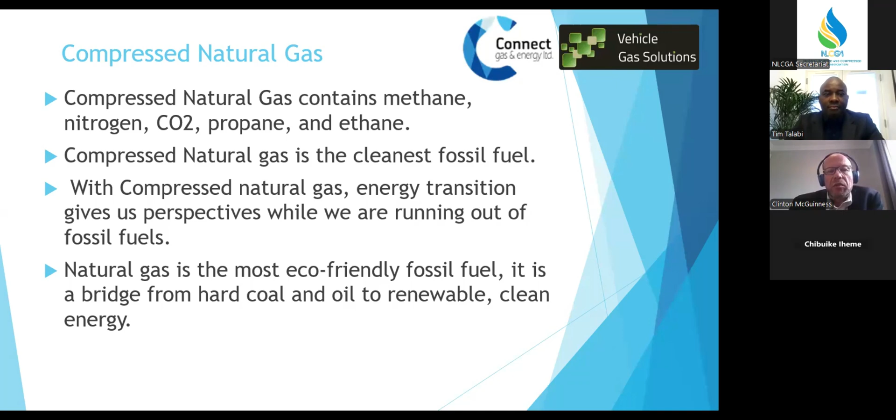The question always comes up, what is CNG? It's a very nice gas because it is cleaner. It's methane gas, not a propane such as LPG. It's lighter than air. The unfortunate part is you have to compress it, but all the regulations are followed, and the equipment used makes it very, very safe. The gas is sourced from coal bed methane or from a natural source or area, then cleaned and put through a compression station into what we can then transfer into vehicles to run them. It's also the cleanest fuel that you can use from the fossil fuels in terms of exhaust emission. If we can move on to the next slide please.

So the difference between CNG and LPG. CNG is compressed natural gas, mainly methane, compressed at 200 bar to 250 bar. Let me explain the two differences. 200 bar is part of the regulation - you cannot put more than 200 bar pressure into a cylinder which is in a vehicle. But if you are transporting it for industry and need to take more volume, you can put the gas into a tanker that can handle the 248, 250 bar pressure.

LPG is liquefied petroleum gas, a mixture between propane and butane. You would also notice that in LPG there's a different mix sometimes from cylinder to cylinder, and you'd be able to smell it - sometimes the LPG smells a bit stronger than the next bottle. It's all to do with the mixture between propane and butane. LPG is also heavier - if it leaks, it drops to the bottom. With natural gas, if it leaks, it dissipates into the air. So natural gas is a lot safer, especially since the gas can disappear into the air instead of pooling and laying on the floor. Generally CNG is a lot cheaper than LPG - that depends on who's supplying the CNG and who's supplying the LPG, but generally CNG is definitely a cheaper fuel. If we can move on to the next slide please.

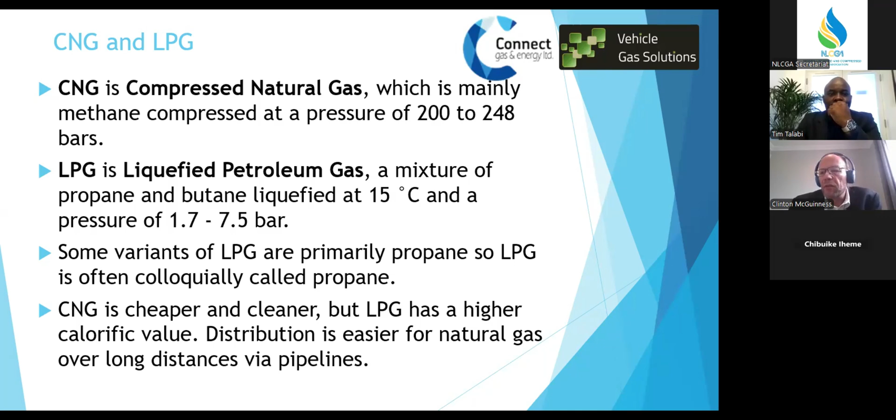The advantages of CNG: it reduces carbon footprint. In many cases, companies taking part in the actual cleaning of the air like this gas because exhaust emissions are a lot cleaner when it's used. They can also claim green points. It eliminates about 20 to 25% less greenhouse gases. Coming back to it - natural gas is the cleanest fossil fuel you can get. It's a proven technology in the world where a lot of vehicles run on natural gas, not just as a fitment off the market, but also where you can purchase a vehicle that just runs on natural gas, not running on two fuels like petrol and gas or diesel and gas. Like I said, it's very competitively priced.

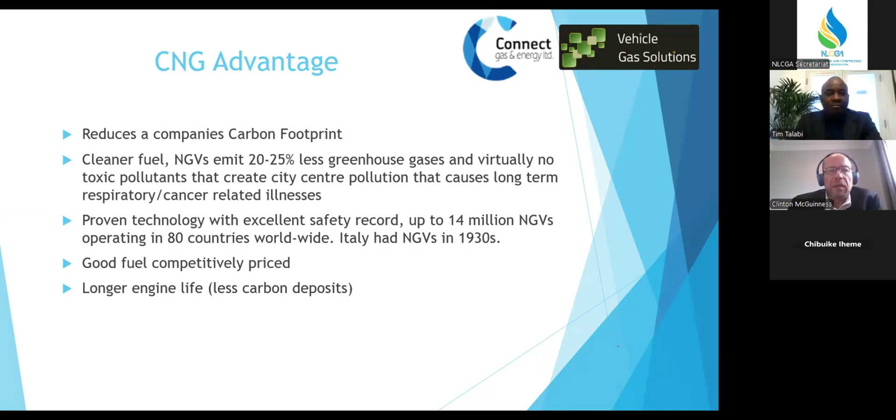In general, your carbon deposits in the engine are less. So if you're running on natural gas, you'd be able to save your engine and prolong your service a little bit more. We don't recommend deviating from it though - we recommend following the manufacturer's service history and schedules. But in general, the oil stays a lot cleaner than what you would get running on normal petrol or LPG.

Filling time is pretty much the same as petrol - if you're filling a cylinder to full versus filling a petrol tank, the time is more or less the same. The performance on a petrol vehicle is similar. Natural gas in its own form is not as strong as petrol, but it can handle itself when we talk kilowatts and horsepower. I don't want to bore you with all the technical information regarding that.

It's non-toxic, so the exhaust is a cleaner emission. I explained to you about it being lighter than air. If you smell gas, it smells similar to LPG, but that's because they put an odor into the natural gas - natural gas on its own hasn't got a smell, and you need to add odor to it in order to identify if it leaks.

It's got a very narrow flammability - where LPG will take just a small particle of LPG mixed with a bit of air and flame immediately, your natural gas needs a lot more gas mixed with air in order to take flame. So in that sense, it's a safer fuel as such.

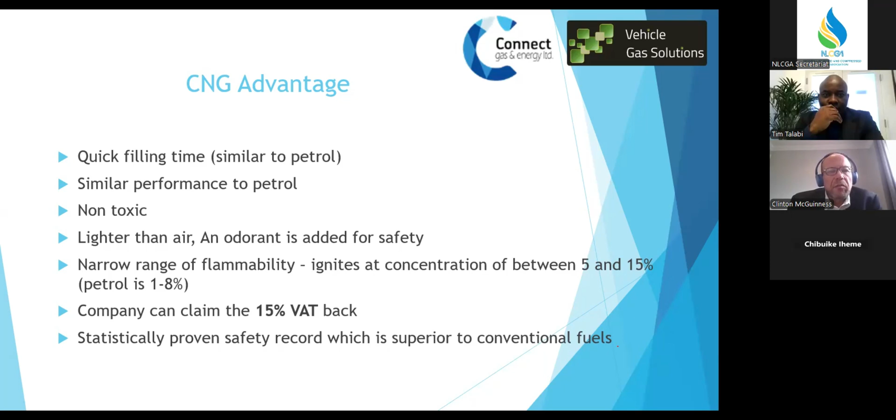It's got a very safe record, safer than I think LPG, but that is just my personal opinion. If we can move on.

In the beginning, in my 15 years of experience, we started off just converting anything that runs on petrol or LPG in order to run on natural gas. Later, we started realizing we could run it in a diesel application with our supplier, and we started doing diesel conversions because the industry turned from petrol vehicles to diesel over a period when diesel was a lot cheaper than petrol, and all the vehicles eventually traded their petrol vehicles in for diesel.

So now we do diesel, what they call dual fuel. If you allow me, I'll take you through what I mean by that - if you can go to the next slide.

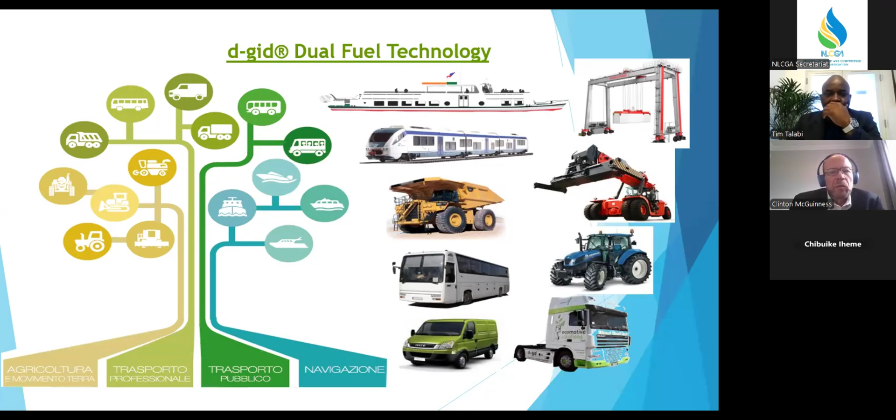What we do is we still use diesel, but we minimize the amount of diesel injected into the engine, and we replace the energy value removed from the diesel with natural gas into the actual engine combustion chamber. Therefore, the diesel engine stays at exactly the same kilowatt horsepower.

It's very important for us to make sure that the mixture of energy is the same as what we remove out of the diesel, to ensure there's no kickback on the gearboxes and the gearboxes hunting for gears.

Just by using our system, we can use the CAN line or the accelerator pedal, and we're able to cut the truck's ECU or the generator's ECU, and tell the ECU we only need so many milliseconds of diesel injection, and we'll take care of the natural gas we put in to bring the energy back to where it's supposed to be.

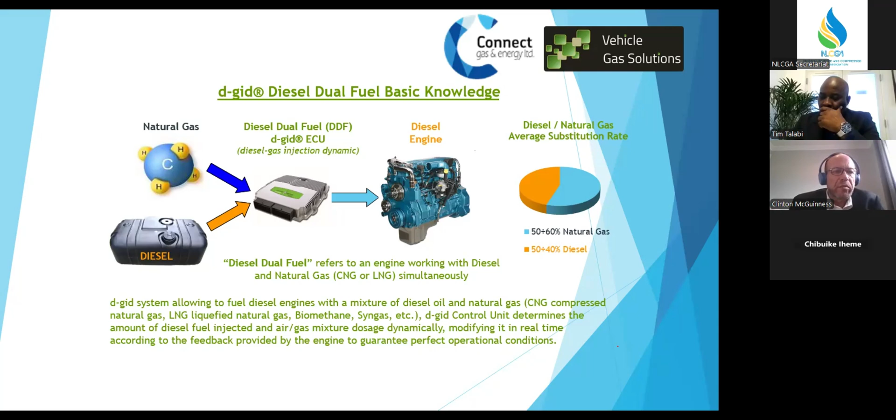If we can move to the next slide, please. Also, we went into the farming industry, the tractors and so forth.

We realized that there's a need in the actual farming industry, and we had to come up with a way to put the cylinders onto a vehicle that works off-road in very rough conditions. If we can just move to the next slide.

Here you will see that we actually fitted cylinders on the front of the tractor instead of the weight that a tractor normally comes with. This is a quick coupler which feeds to the engine from the cylinder.

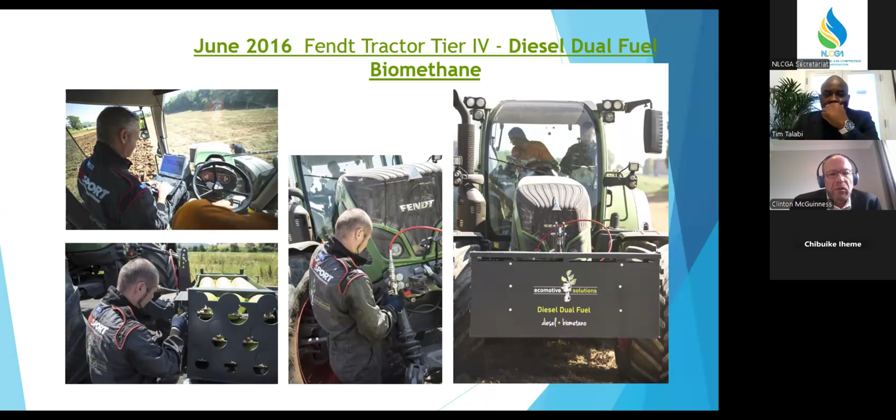So the farmer will farm with his tractor in dual fuel mode, and when he's done, he'll drop the front pack and pick up a new one that's been filled. So when it comes to a compressor, he'll use a small compressor - he doesn't need very expensive high compressors in order to run his project on his farm.

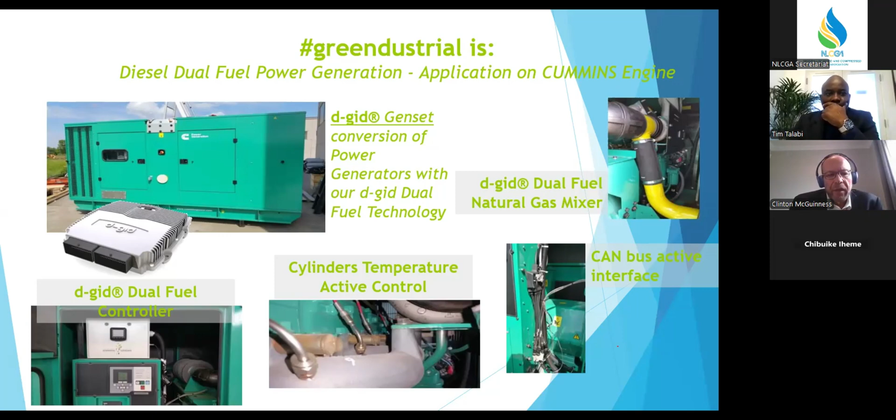We used CNG for a test before the LNG was introduced. You'll find Caterpillar has got an LNG CAT 777. The mine decided to go with us because we are a quarter of the price of what an LNG CAT 777 would be. In the next slide, I hope to demonstrate the engine we converted, one of the trucks.

This was done on a dynamometer. The engine was put onto a dyno, and we fed dual fuel gas into the actual unit.

It doesn't want to play for some reason. Okay, if you don't mind, I'm just going to show you the truck we were busy with, it was a water tanker. Just let me talk you through this. Has it paused now, or is there a bit of a delay?

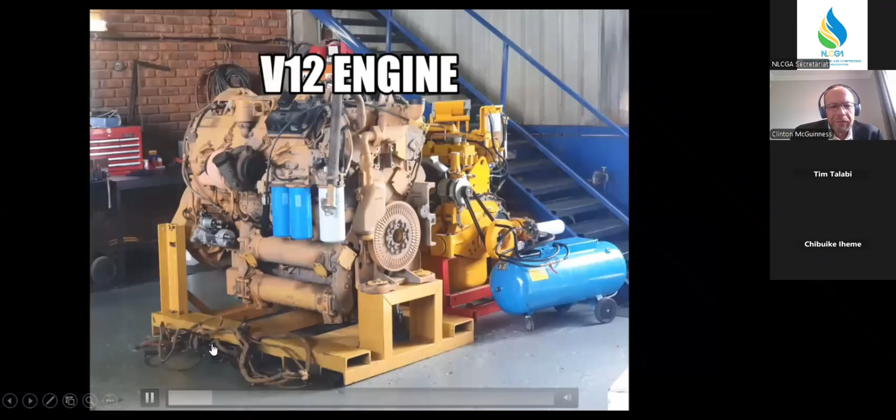Sorry about that, guys, there was a glitch on the music that was playing there.

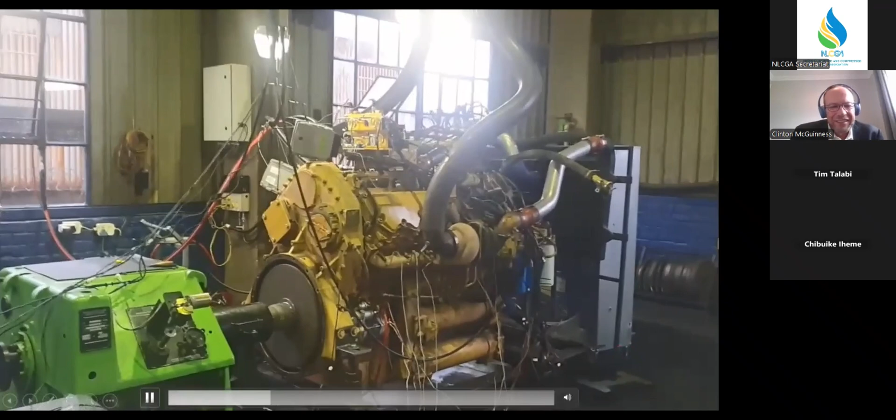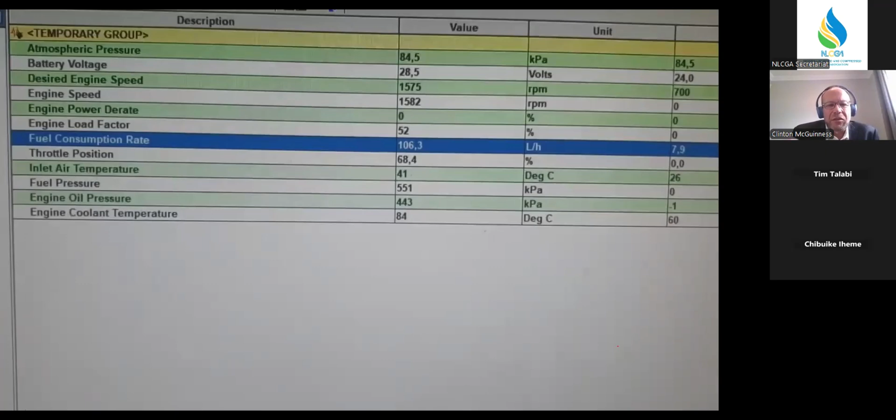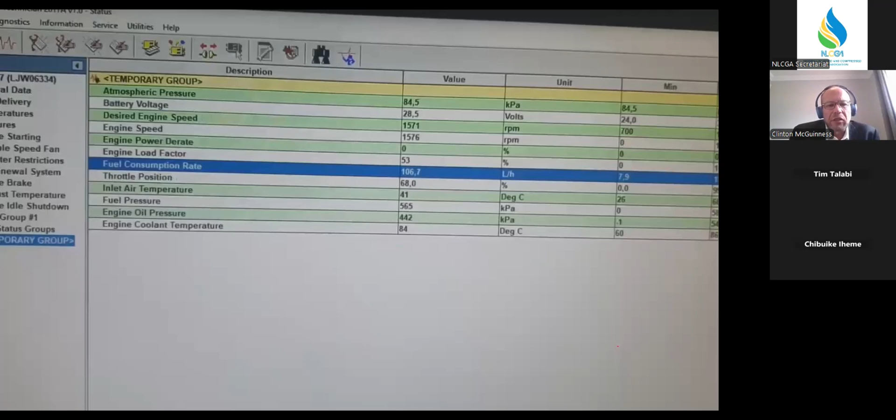Nevertheless, here you can see the control panels that we used, one for the engine and one for our system. The fuel consumption rate at that power output the engine was giving was 107, 108 liters of diesel per hour.

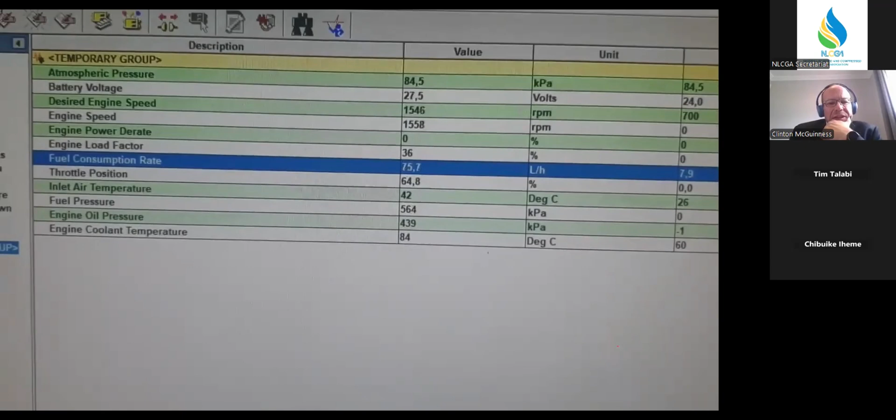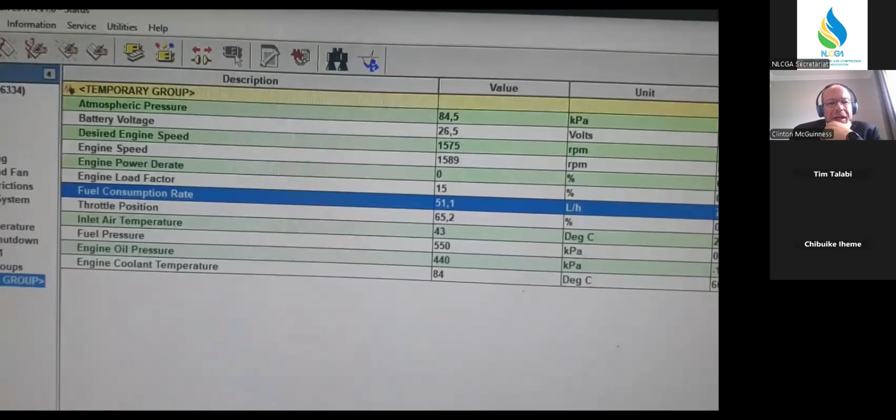You saw the flash, the gas is now getting introduced into the engine and the diesel is being cut. This is real time from the actual computer of the truck, so you can see how much fuel we could cut on a CAT 777 engine.

It was a very nice project to do. Now we're just waiting for the LNG to hit our shores.

Some previous projects, just to give you some info. We didn't just stop at vehicles, we did Hysters. The Toyota plant in South Africa was converted to run all their vehicles on natural gas. The engineer heading the project said, in his words, it was a no-brainer. He spent the money and recovered it in 2 months just by converting all the units to run on natural gas.

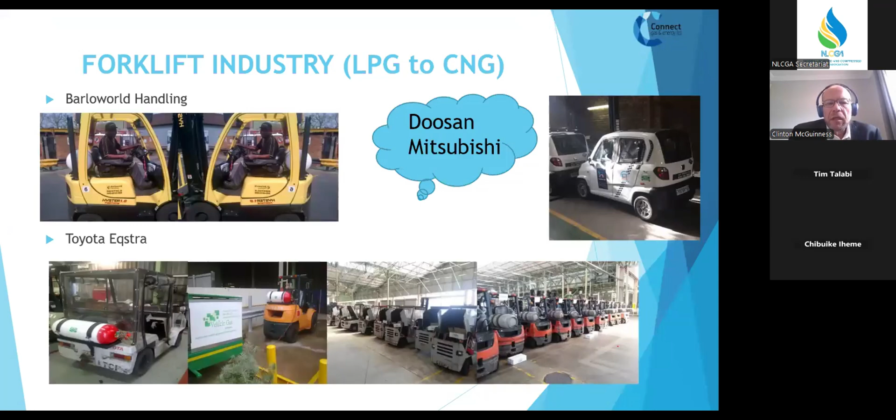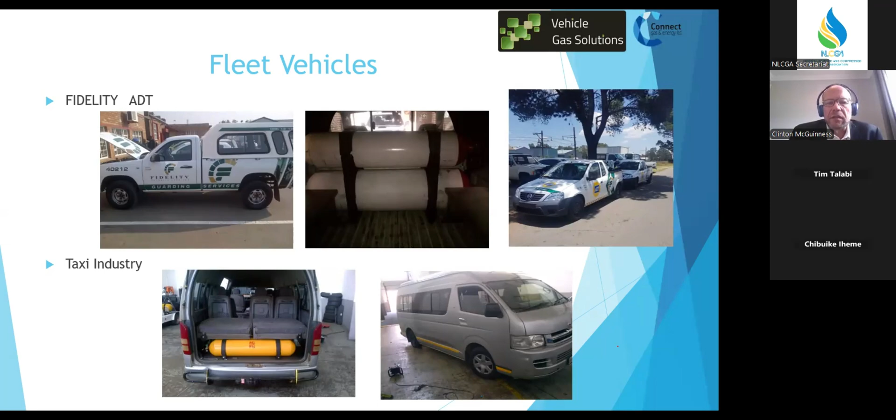We can move to the next slide. Here are some new taxis, new vehicles that came off the floor which we converted for Nissan. We're Nissan approved, and we're also Isuzu approved.

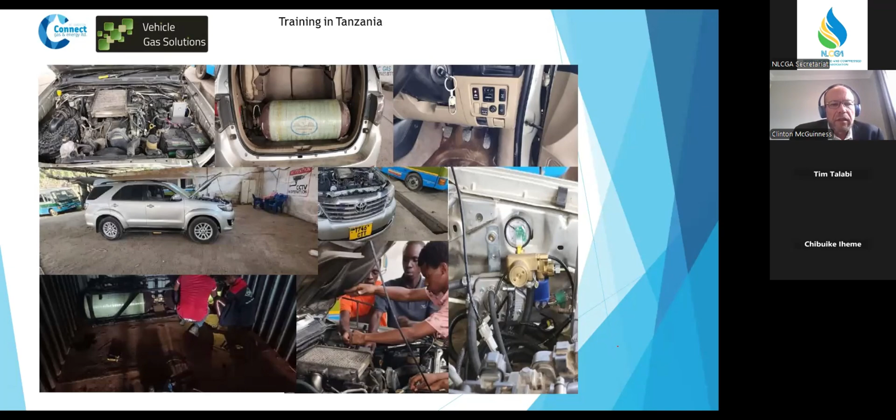Some vehicles where we started doing training in Tanzania, converting and handing over to individuals so they can take care of the systems we fit. Some buses, some trucks, so we can move on.

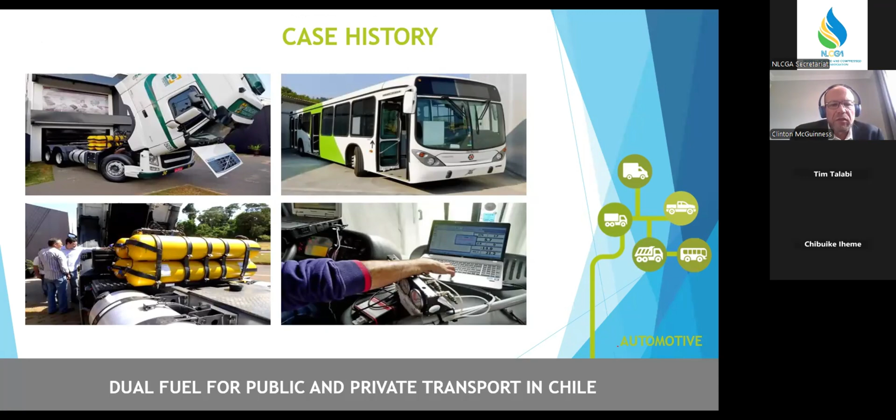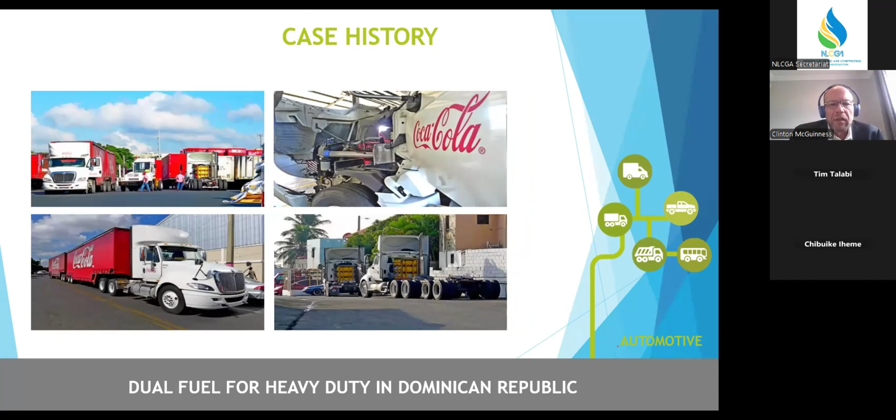So I want to have a quick discussion regarding regulation, and it's important to understand that everything used where pressure is high, where equipment is in such demand or at risk that it could fail under normal working conditions - when you start looking at that, you start looking at what is your safety part of it. You need documentation, you need a standard to follow, to understand what is the limitation of the product and what are the manufacturing standards used to manufacture it. You definitely don't want cylinders blowing up and hurting people.

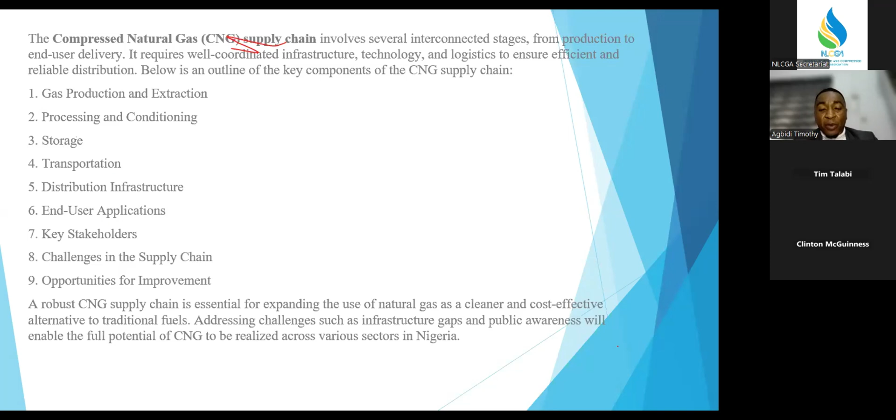So there are very good, specialized containers that can be used to store your CNG, and it can be used to move them around. If you're in the West, you see them going around everywhere. So it is very, very easy to move around and then use in your area.

Let's go to the steps in entering the CNG business. Like somebody was asking some time ago, what will happen with A in starting this business might not be the same with what will happen in B, because there are unique trends in different places.

But the major thing you need to understand when starting this business is, first of all, conduct your market research. You understand the demand in your area. Who are the competitors you are going to be? Take an analysis and identify the opportunities that are in your area.

Then define your business model. What do you want to enter? Do you want to enter into CNG refueling station? Do you want to enter into vehicle conversion services? Do you want to enter into industrial supply? Or do you want to enter into virtual pipelines? All of this, you have to find out before you go into business.

Then create a business plan. It is very important you create a business plan and also secure funding. And then there are other things like obtaining regulatory approvals. It's very important you obtain regulatory approval. I think we'll not be able to exhaust all of these things, but with this short point, I think it's very interesting and very profitable to go into CNG business.

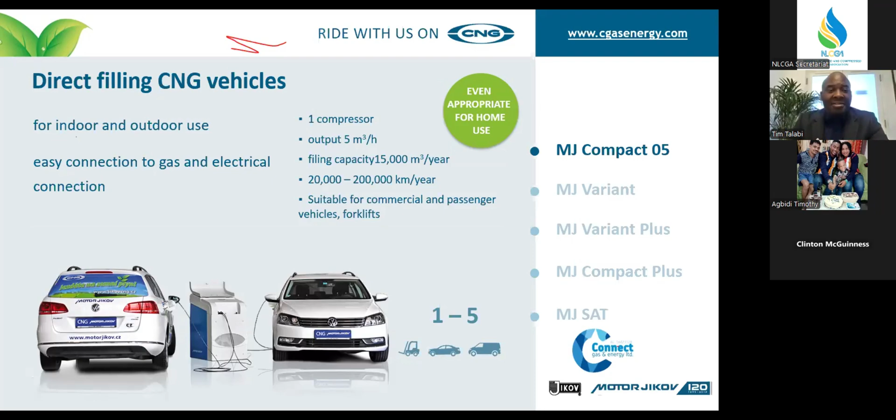So if you have MJ Compact 05, which means anything between 1 to 5 vehicles a day, that can help you, it can work. The next one we have is MJ Variant, which can take anything between 5 to 20 vehicles a day. And then the third one is MJ Compact Plus, which can take up to 70 vehicles a day.

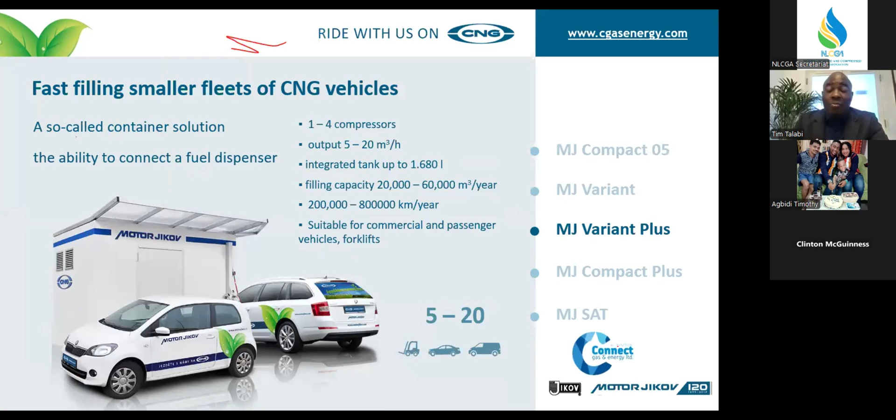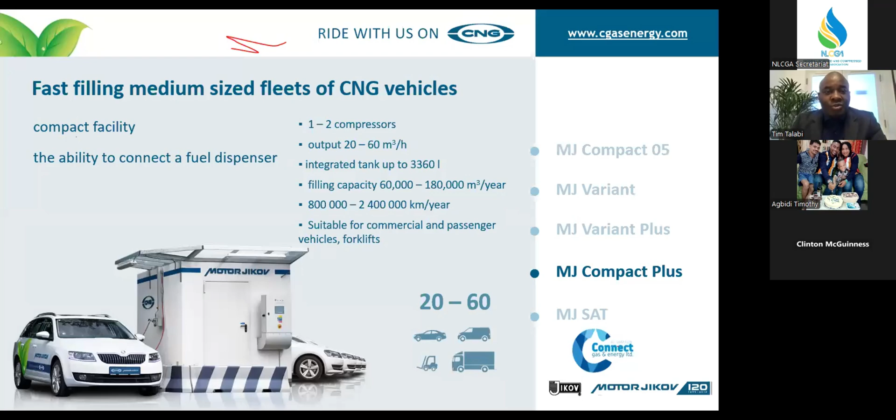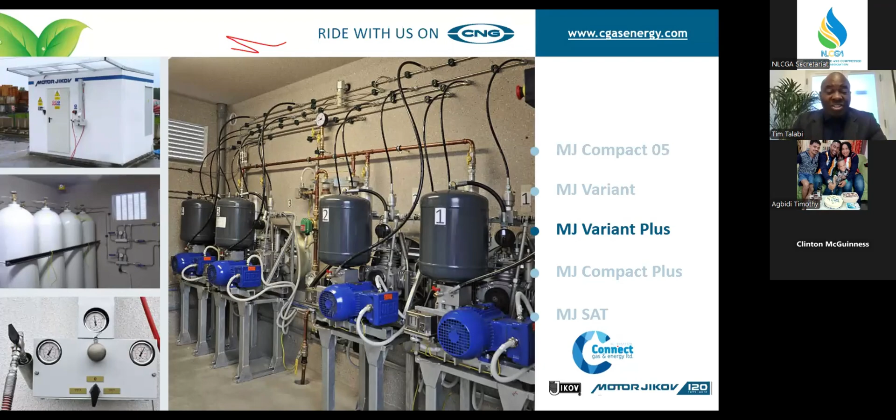Now, the good news with these ones is that they are game changers, which means you don't need too much financial resources to even start. And because it's plug and play, you don't need your PRMS, which is the pressure reducing metering system. If you want to adopt it as part of your business portfolio, we can sit down with you, design it out for you, and help you.

Now, also the good news is this: we can also help you with credit application because everything can be import financed. However, the caveat is you need to have a local bank guarantee. Once you have that, we can help you with the credit application and help you with the design and installation, and help you build that portfolio where you now have CNG adopted as part of your product mix in your LPG business.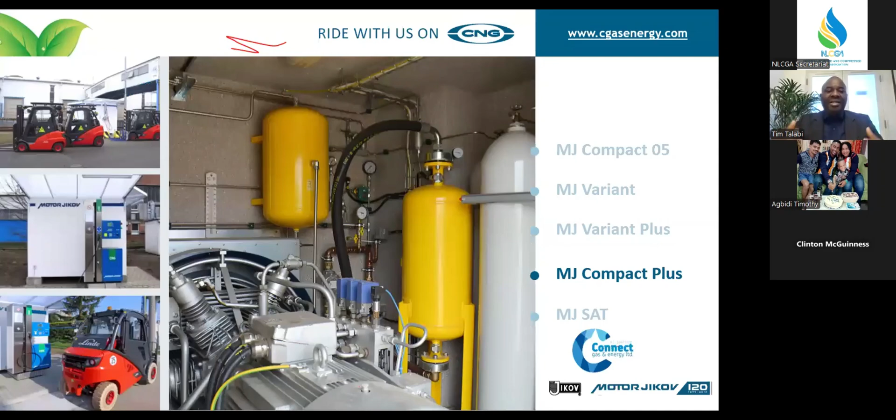For the sake of time, I just felt we needed to say this, because the whole point of this webinar is to build awareness and say, hey, these are opportunities you can have in increasing your product portfolio.

I'll leave this section to the chairman of the technical committee of CNG. We're working in collaboration with the association. Upcoming workshops we'll be having on NGV: natural gas vehicles, fundamentals, maintenance, refueling, safety, best practices, health and safety, and many more. I'll leave all those with the chairman of the technical committee.

In terms of contacts, we have our contact details in there. We are part of this association, and we are here to work with everyone. Let's drive the adoption of CNG and increase our product portfolio.

It will interest you to know that as a company, we actually started in Nigeria as an LPG business, hence why we joined the association. Over time we increased our portfolio mix to CNG. Now we have CNG, and part of our strategic plan is to move on to LNG and other gases.

I'm so happy the association has decided to rebrand and increase our mix to more than just LPG, but also other gases. So I think I'll stop here, and we hand over back to the chairman of the technical committee, and then we can take some questions. Thank you.